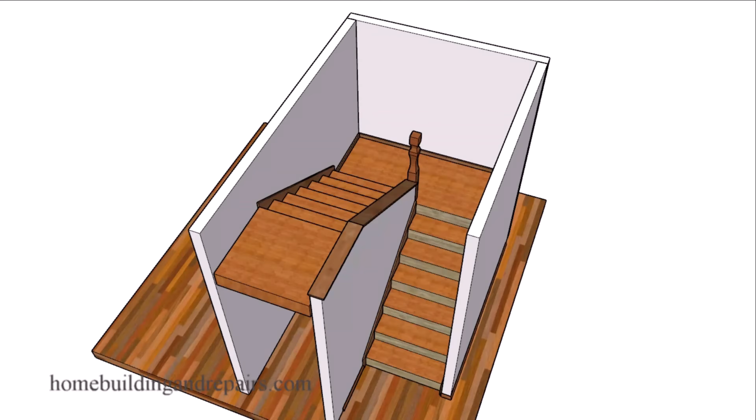Here is another video series that I plan on making more videos on, and that will be about trimming out the stairway, kind of finishing out a variety of different stairways.

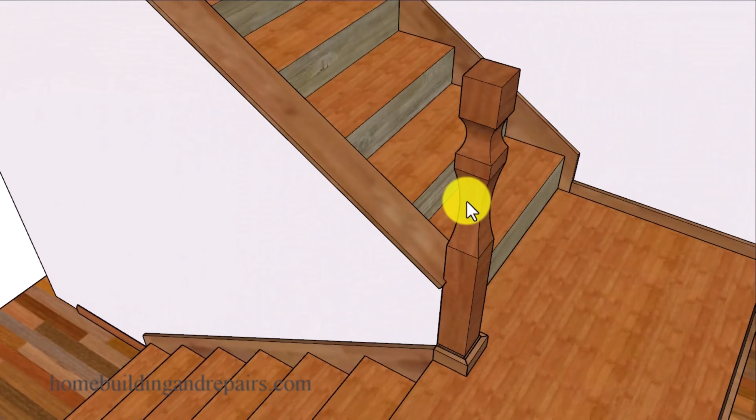And then we're going to have some floor trim that will just kind of go around here, and the floor trim here will die into the edge of the skirt board here. Next up, let's go ahead and remove one of the walls so it doesn't block our view. And this area here is going to be the main focus of this video, and hopefully I'll be able to provide him and you with a few suggestions that might work for you if you run into this problem. So let's go ahead and take a look at the other side here.

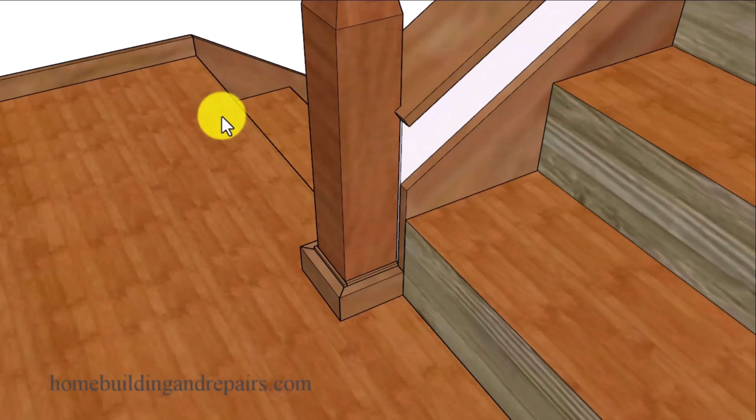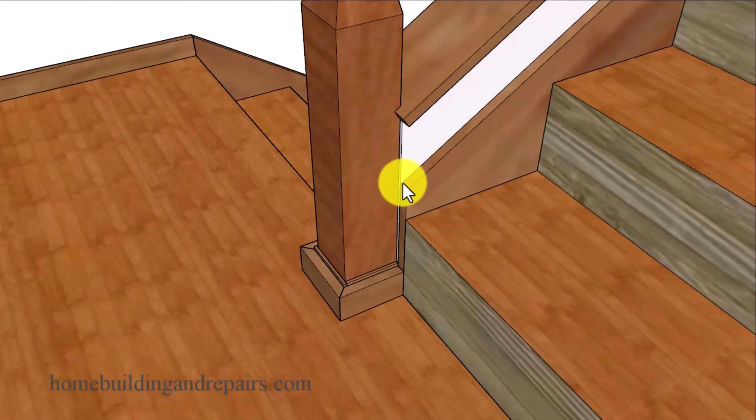And if you're dealing with a situation where the newel post is a little further this way and the skirt board extends out, I still don't think you're going to have a problem using this method here. And for this example here, we're simply going to use the boards again that are the same width, same thickness as the skirt boards for the base boards. And then I'm going to cut some trim boards in here. That will be the distance between the newel post and the other side of the skirt board, or the thickness of the drywall or the wall finish.

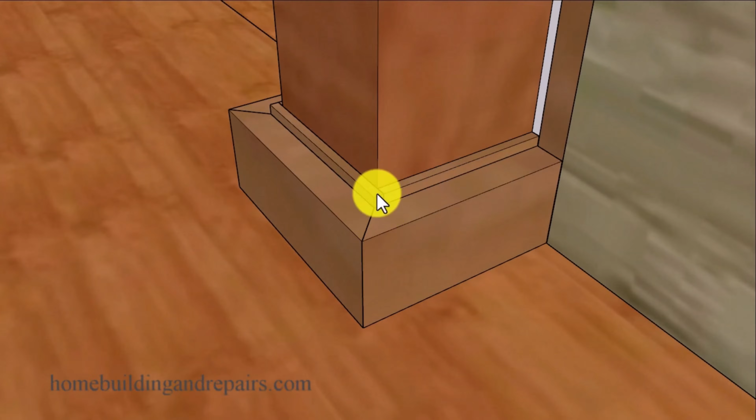And in this example here, I'm just going to hold these up 1/4 of an inch. And again, you can miter these angles also. And I'm only using these to provide us with another detail or design. You could always use different types of trim, as long as somehow they represent the thickness of this area here. You want it to be dying into this area here for this example.

Another thing you could do would be to extend this portion of the trim a little higher. And again, we're using this piece here to die into the wall to create an even or flat surface and a nice transition between the pieces. And as I said, you could always miter the corners if you want it to look a little nicer, and extend the length even higher if that's going to work for you.

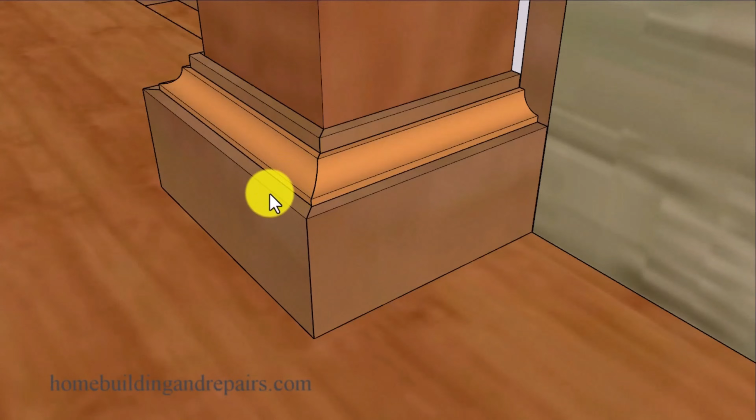Next up, let's go ahead and add some cove molding. And I'm going to have the reveal here the same. We're going to have 1/4 of an inch reveal here, 1/4 of an inch reveal here. And you can see where all of this stuff is making a nice transition into everything, and then transitioning down the top of the skirt board. So not a bad looking design here.

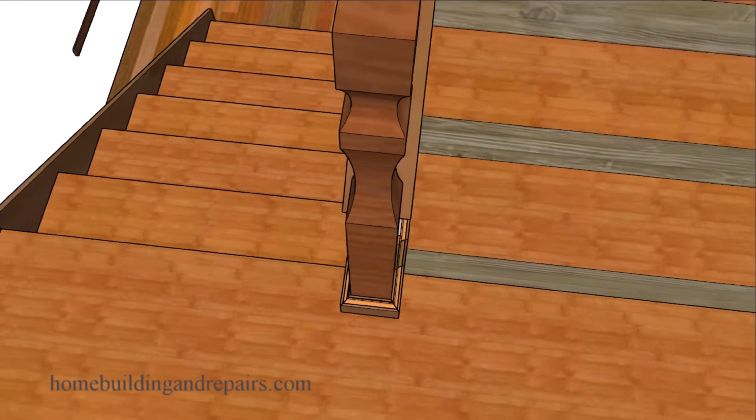And again, just in case you missed it, we can always make these trim boards here wider if we need to, depending upon the thickness of the wall and the thickness of the newel post. And if you want the trim to go up the other side, you can always do something like this. And all I'm doing here is extending this trim board here and then adding the molding. So another nice detail. And again, we're keeping all of this 1/4 of an inch reveal here.

And if you don't like the square corners, you could always grab a router and round these corners off, providing another nice detail. And in our next example, this is another way that I have seen plenty of finish carpenters use to finish something like this. And that would be to not use any wood trim and kind of leave this area as it is. Leave it alone, and then have the top of the skirt board even with the top of the landing. So again, another way to finish it.

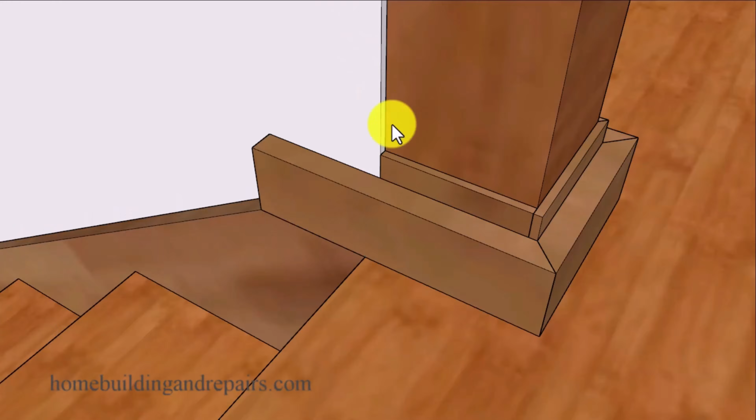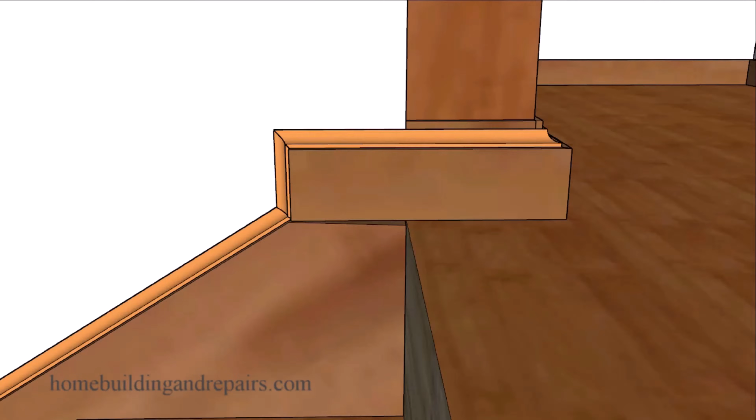And again, when you add all of this stuff here, I really don't know how noticeable this piece is going to be. And if that's the case, something like this might work better. Just bring something out to the edge here, and then run your trim around it. And again, all we're doing here is getting creative. And some of the best finish carpenters out there are extremely creative and can make a variety of different mistakes look great.

Now let's get back to the original question where the top of the skirt board wasn't cut straight. And if that's the case, then this idea might not work well. And I do understand you could always take this piece here and shape it to fit in this area. So that would be another option also. However, it's not going to create a nice straight line here.

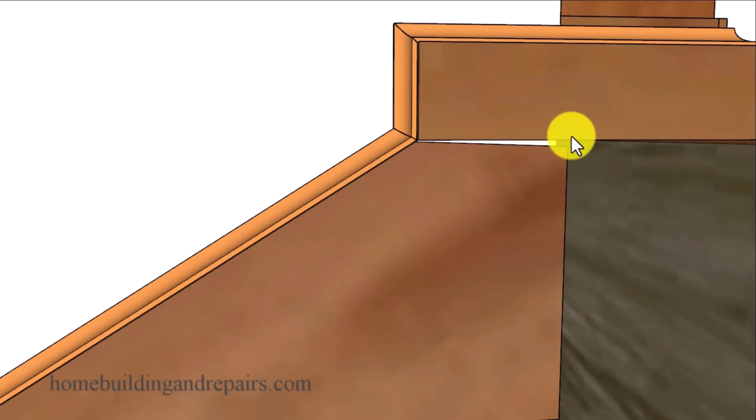And if that's the case, you can always add another trim board. And even though I have a larger one here, you can always use a smaller one and one that is shaped, maybe rounded at the top, rounded at the bottom, and then run the trim around the base of the entire landing to make it look like it was all part of the original design. Now, it doesn't need to run all the way down the stairway, but it does need to finish into something.

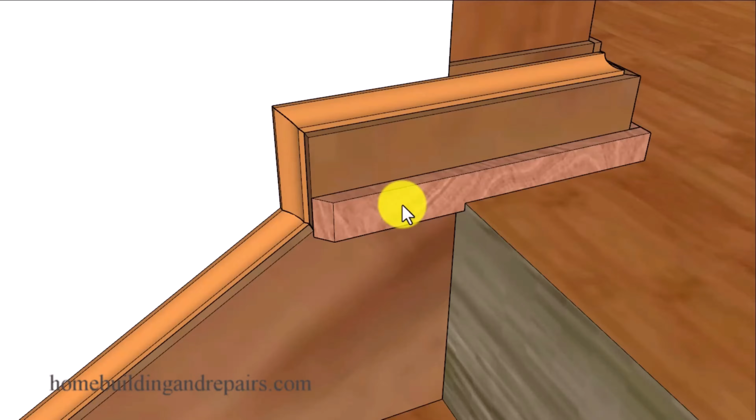And if you don't like this right here, then you're going to have to match the side. Have this one on this side the same as the one on the other side. And again, you can always use something smaller here. And I think in reality, for a situation like this, and like most of the situations you're going to have doing finish carpentry, what most finish carpenters are trying to do will be to cover something by using another piece of trim or create a surface that is going to make a flat, smooth transition without any gaps, or you're going to need to fill it.

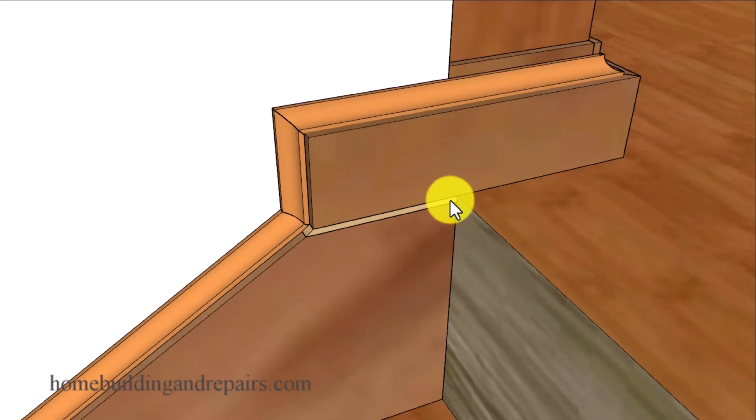And this is my final suggestion. And that would be to cut the top of the skirt board somehow to where it is nice and flat. And then you could use the same wood or a different type of wood to create a nice transition here and fix this mistake. So again, we're either going to fill something or cover it to fix a mistake like this most of the time.

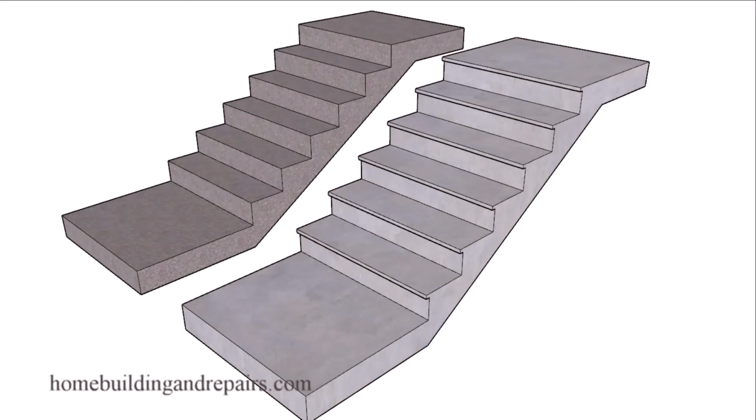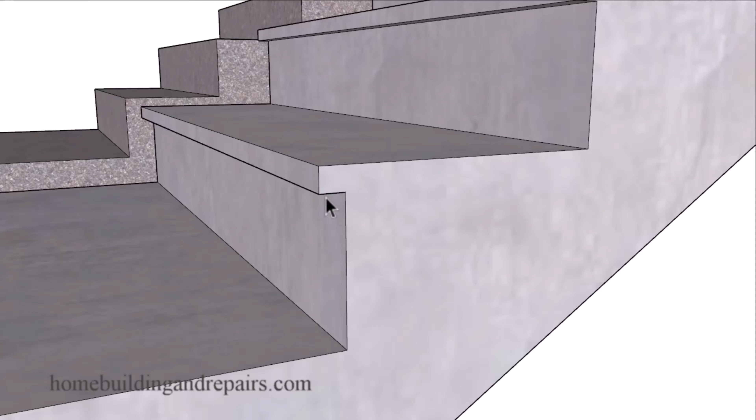Here is another video requested by a couple of our viewers who wanted to know if the nosing, the stair tread nosing, or the overhang, something like this, is a legal requirement. And I have not come across a building code yet that has suggested that it is. However, feel free to leave the building code reference number if you have it for your city, county, state, country, whatever it is, and I'll be glad to check it out. But as far as I know, there are no building codes or, in my opinion, reasons why you couldn't build a safe set of stairs without a nosing.

Now, another thing I would like to suggest is that you take a look at stairs built in your area if you're not going to contact your local building department, especially a building with new stairs, because that will tell you that these buildings were built with newer building codes. And if you notice that all of the stairs in your area have nosings, including those built out of masonry and concrete, then your stairway might require a nosing also.

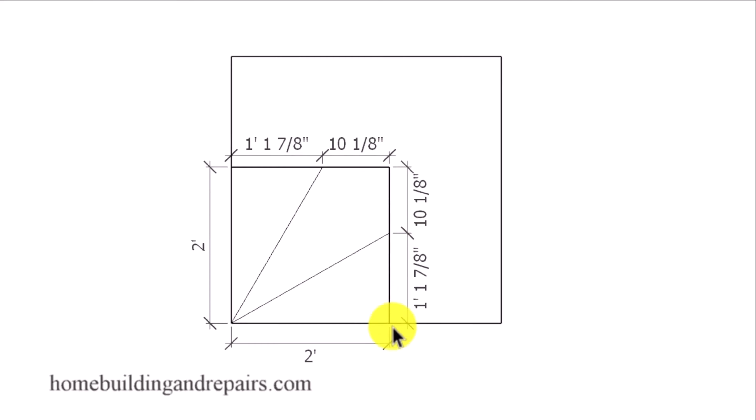And last on our list, we will use a 2-foot square with these measurements here. And the reason why I'm providing you with a 2-foot square, even though this isn't going to work for most stairways, is that we can usually insert our 2-foot square into another square that has larger measurements, like this one right here. So here we have a smaller square inside of a larger square where we can lay out this point here and this point here in this square, and then simply extend these lines out to the point where we need them to be.

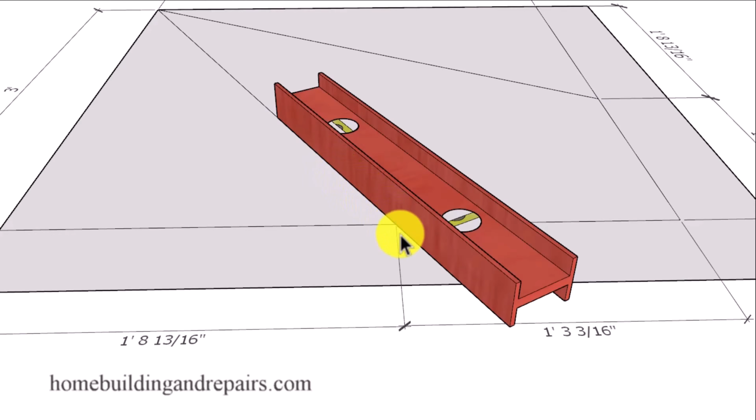Or we can use our 3-foot square with our 3-foot measurements also, and simply grab a straight edge like a level and then line it up with our line here so that we can continue this line to the desired point. And we can always check the measurements after we have extended the lines, to make sure that they are exactly the same or close enough for your tolerance.

So to provide a brief summary of what we've done so far, we've just simply grabbed a smaller square where we know what the measurements are and extended a line from the center point to our new location to provide us with a 30-degree angle.

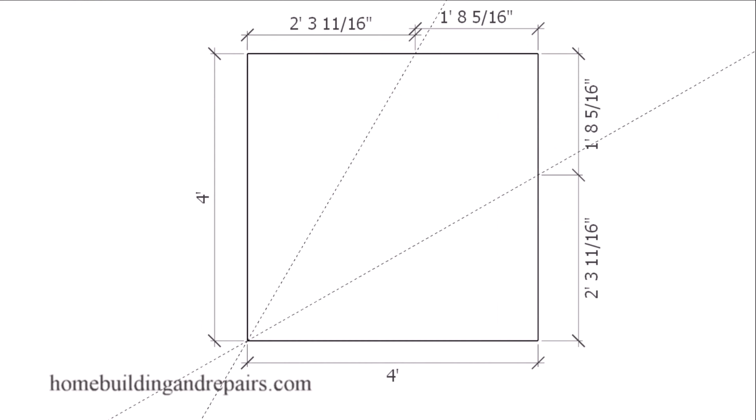Next up, let's just go ahead and provide you with a couple of things that you might think would work. And one of those would be to measure across at a diagonal and divide everything up equally. And you can see here where this measurement and this measurement are exactly the same. However, the one in the center is not, for those of you thinking that it might be when it isn't.

However, we can use another method that I found while doing some research for this video, and that would be to use a 2-foot radius and simply draw a curved line. And then from this point here, we're going to draw another 2-foot curved line using this line right here as our center point. So not too difficult.

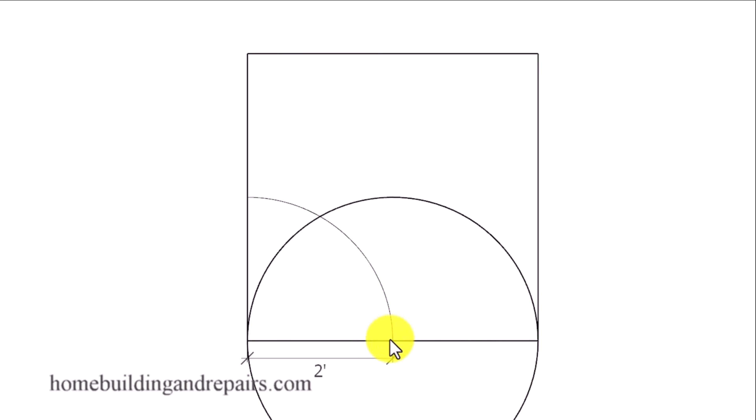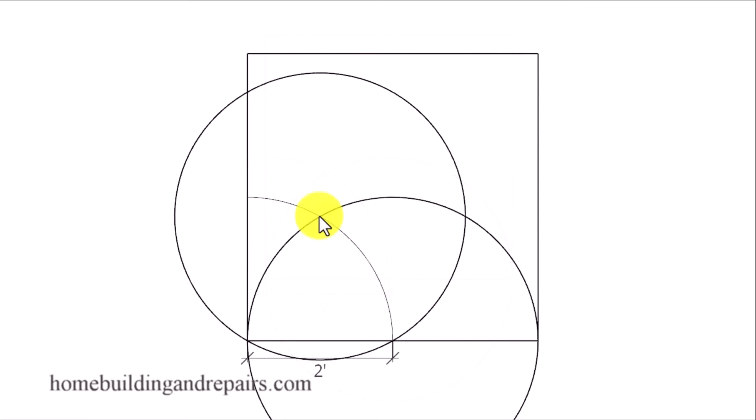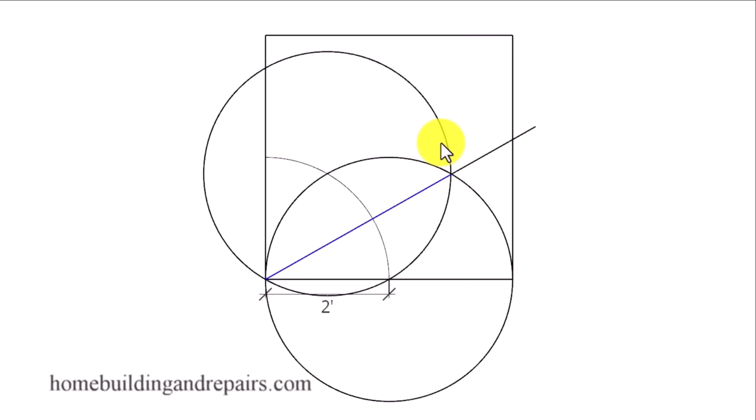So now that we have this right here, let's go ahead and draw another circle with a 2-foot radius. Now you don't need to go all the way around. Same thing with this. You just need to get to the intersecting points, which would be here, here, and here. Because next up, all we need to do is connect the dots here. We can draw a straight line from this point right here through this intersecting point where the circles are intersecting with each other, and that would look something like this.

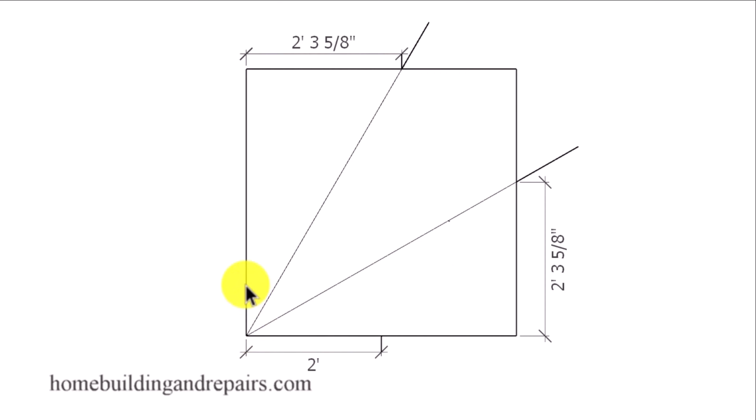Now, once we have this line, we can simply measure the distance from here to here and transfer it over to here, to play connect the dots again and draw a line through here, providing us with 3 30-degree angles. We have a 90-degree angle. If we divide that by 3, we're going to get 3 30-degree angles. And in my opinion, it can't get much simpler than this.

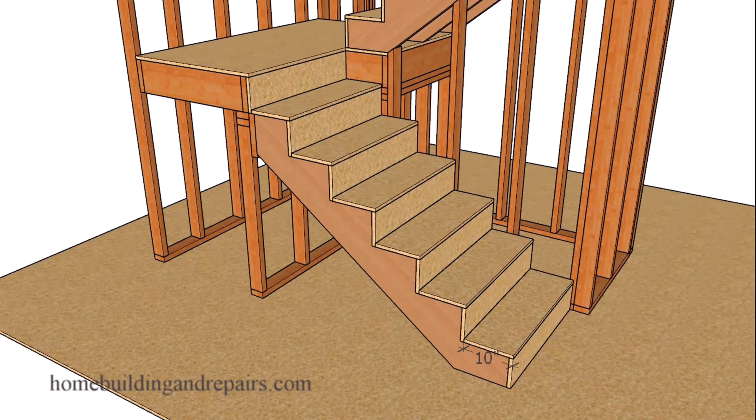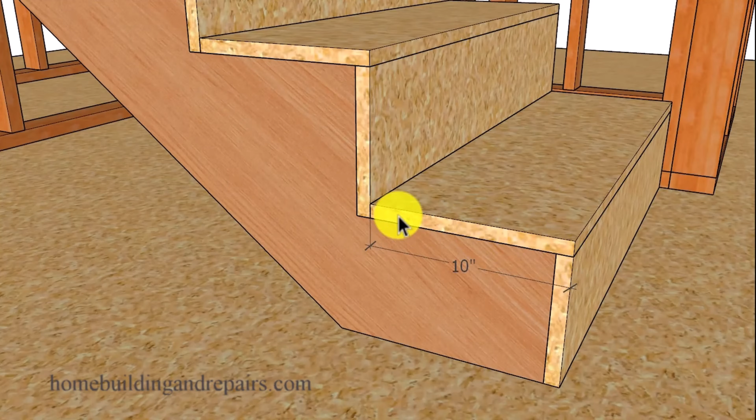Here is a building code that changed in the International Residential Code books in 2021, and you would need to check with your local building department to see if they are going to enforce it. That code is suggesting that if you have any treads smaller than 11 inches, then you will need to install a nosing on those steps.

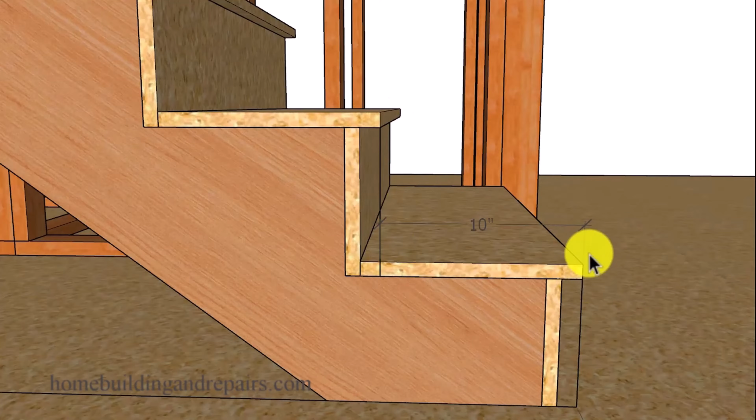I have built over 1,000 sets of stairs in my career and can tell you that most of the time we used a 10-inch tread measurement along with a 1-inch overhang, providing us with an 11-inch step. For those of you who are a little confused, we're still going to have a 10-inch tread. I do have other videos on that, but the building code measures the tread from the farthest protruding point on the step above to the farthest protruding point on the step below.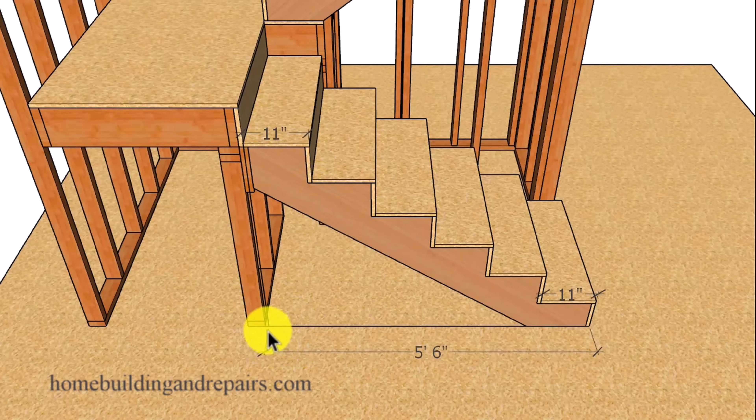So we're still going to have a 10-inch tread, and that can usually be seen when you're laying out or designing the stairway. So here we have 60 inches and 6 steps. However, if you make the steps 11 inches wide, now we're going to have 66 inches down here, then you won't need a nosing. That's basically what this new building code is suggesting.

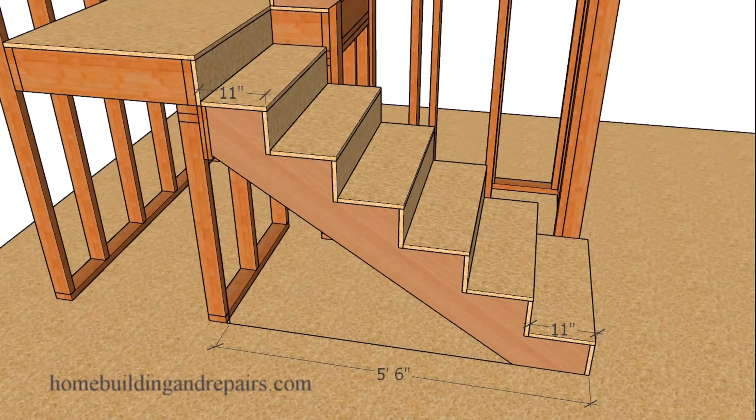I would suggest contacting your local building department or local building code enforcement inspectors to verify whether or not they are going to use this particular exemption.

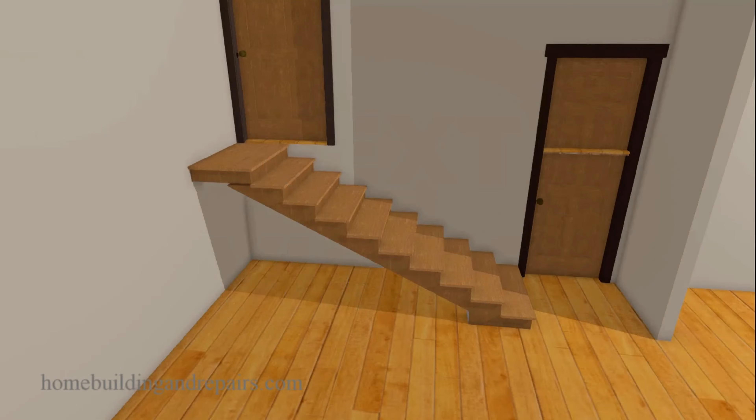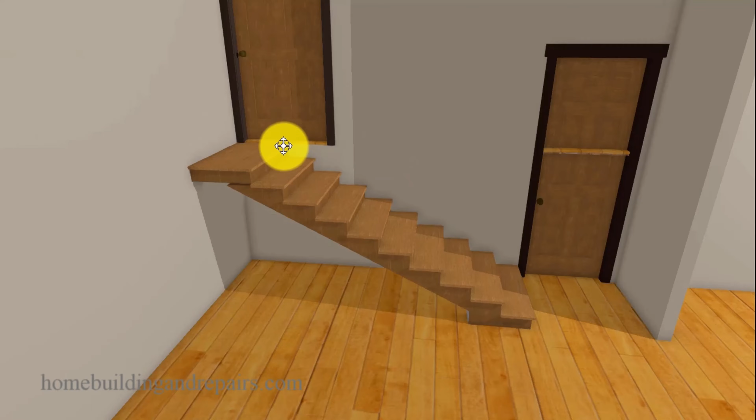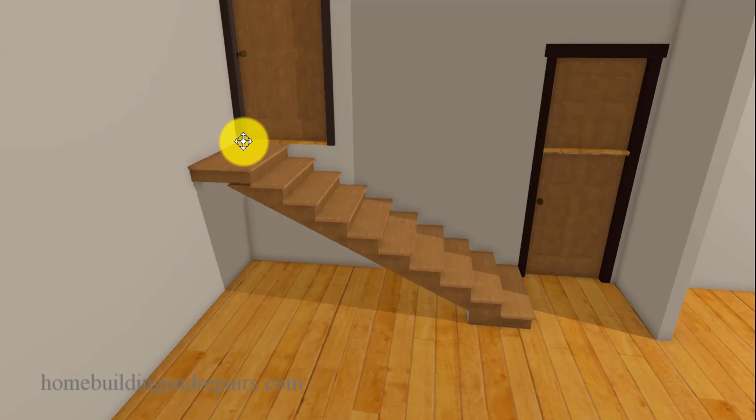Here's something you are not going to see every day, and I believe this is about the first time I ever witnessed it. Someone sent me a picture, and it looks something like this. The edge of the landing, the front nosing, was located about in the middle of the doorway, and in reality it needs to come out to the edge of the door, and of course that would depend upon the width of the door. I think most building codes require a minimum of 36 inches, 3 feet in both directions, but of course that would change if you had a door, and I'm not familiar with those building codes.

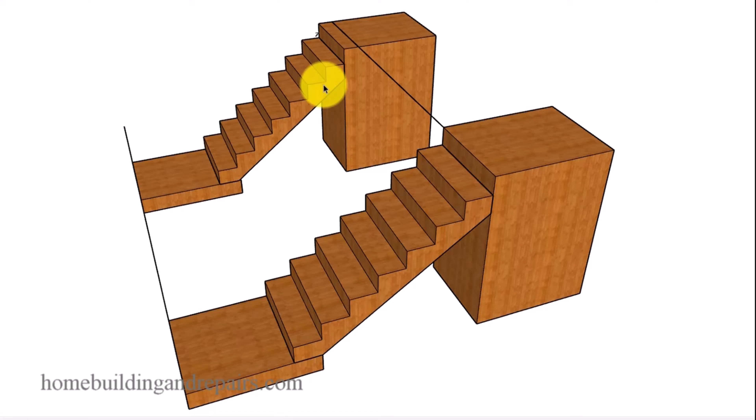But realistically, the only way you're going to fix something like this will be to shorten the width or the depth of each individual step. It's the only way I could think of fixing something like this. It would be up to you to figure out if it's even worth changing, because sometimes you are going to create a bigger problem by having a tread that might be a little smaller than approved by the building code. So you're basically trying to solve one problem, make the landing a little longer, but if you don't have enough room, you're going to be creating another problem by making the steps a little smaller or the risers a little taller.

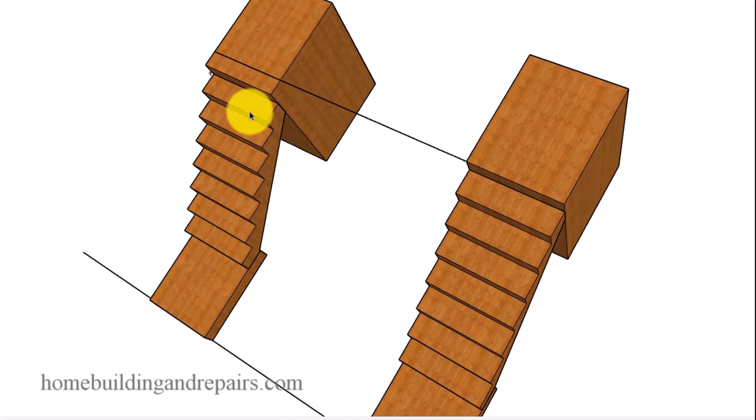So let's go ahead and take a look at what we got here. You can see these are 10-inch treads: 1, 2, 3, 4, 5, 6, 7. So we would have 70 inches between the face of the landing at the top and the face of the lower tread if we drew a horizontal line. I'll show you more what I'm talking about there in a second. So this right here will give us 7 more inches. 7 steps, we take 1 inch off of each step, and we now have a 9-inch tread. This is an illegal tread according to most building codes, but you would need to verify that in your community or through your local building and safety department.

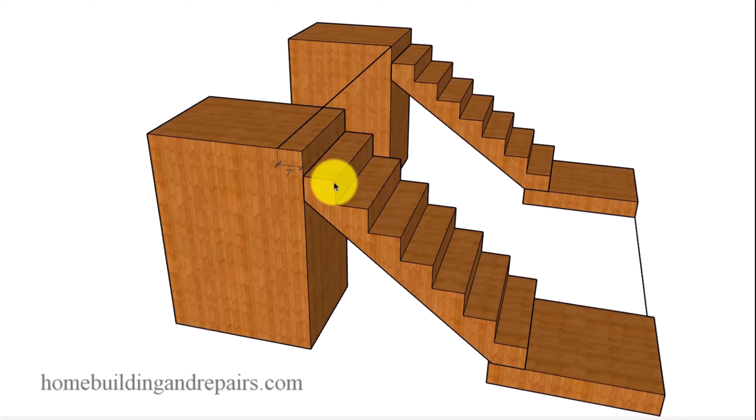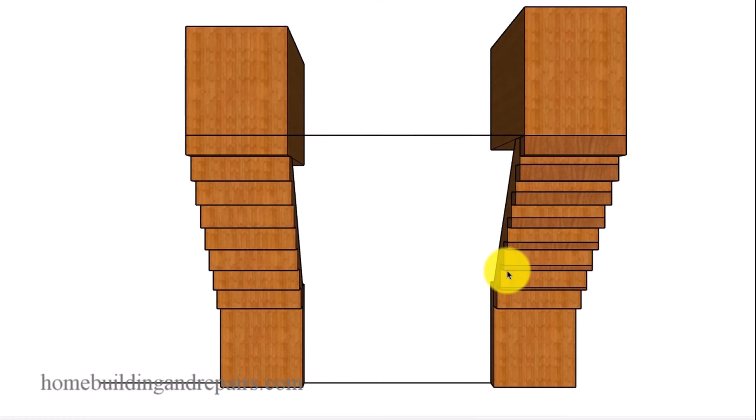If you're looking for a method to fix something like this and you don't want to tear apart the stairs, you could simply add incremental sections to the front of each step to create the new stairway. So we're at 7 inches here. We would need to add a 7-inch piece to the top and only a 1-inch piece here. You would add 1 inch, 2 inches, 3 inches, 4 inches, 5 inches, 6 inches, and 7 inches to the front of the stairs to eliminate cutting a new set of stairs or building a new stairway. So something like this might work. Again, I'm just kind of throwing out an idea here.

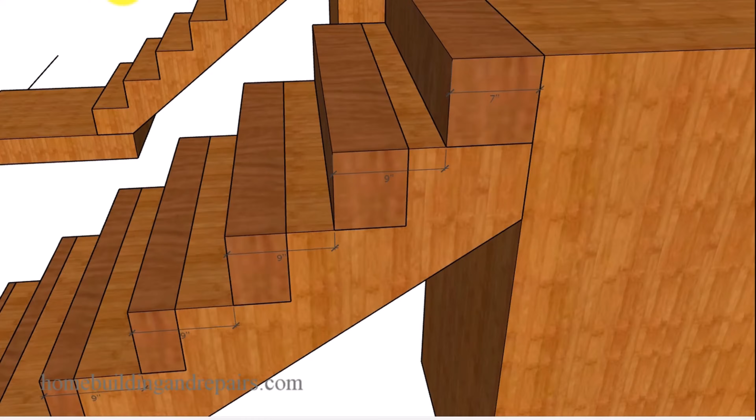Something else you might want to do would be to remove one of these steps. So we have 7 here: 1, 2, 3, 4, 5, 6, 7. We have 5 foot 10 inches, which is 70 inches.

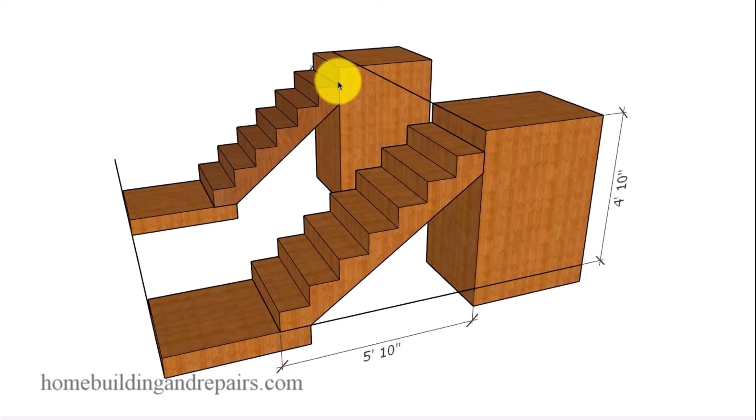And if we simply make it a little smaller, 1, 2, 3, 4, 5, 6 steps, if we can eliminate a step, but that would increase the riser height, then that might be another option. But of course, this would involve tearing apart the stairway and rebuilding it.

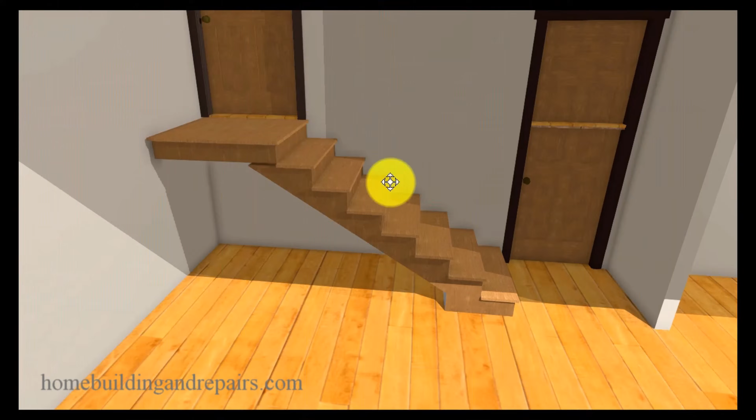Now for the bad news, I would imagine that your stairway was built that way for a reason, and you might not have enough room to build a stairway that's going to meet local building codes. So let's just go over the building codes. 7 3/4 of an inch is usually the maximum height for each individual riser. And the depth is usually going to be 10 inches for a residential set of stairs for a private dwelling. Now, you would need to check with your local building department to verify that information.

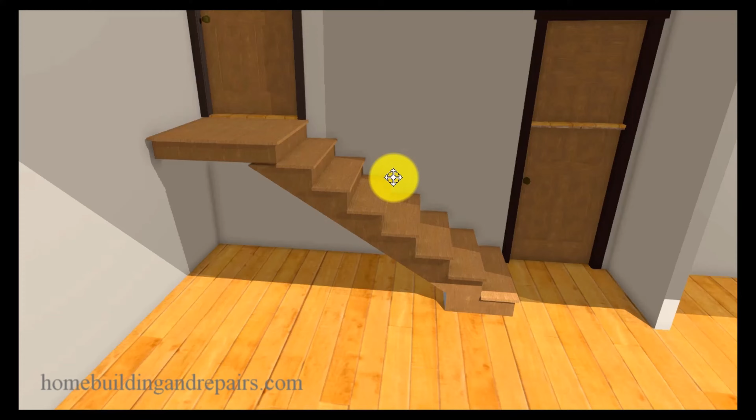And I hate to say this, I wouldn't bring this to your building department's attention. I wouldn't say, you know what, I've got a problem here, because they could make you do some work here. So I'll leave it up to you whether or not you want to bring it to their attention. I have known people who have brought stuff like this to their attention, and it's cost them thousands of dollars. But I'll leave it up to you. You want to leave something unsafe or you want to fix it, do it right. That will be your final decision.

Now, here's the distance I was talking about when I was asking the person in the email to measure between the doors. If you have enough room here, this will determine your tread size and how many treads you'll be able to use. If you have 70 inches here, then you're going to be able to put 7 steps. If you have 60 inches, but you need 7 steps, you're probably not going to be building a safe stairway. So I think I've driven that point home enough. You would need to do all the calculations.

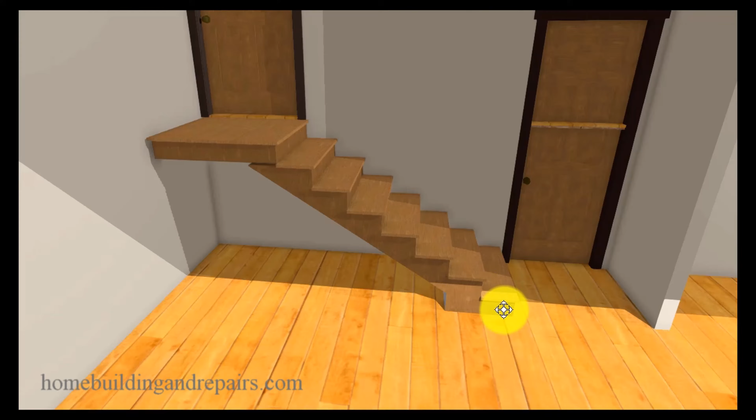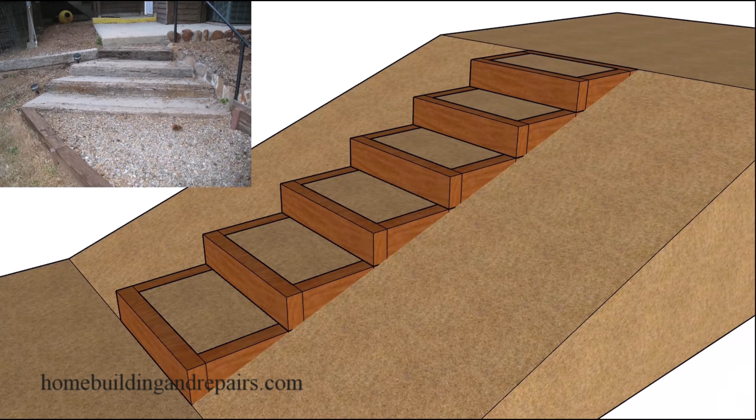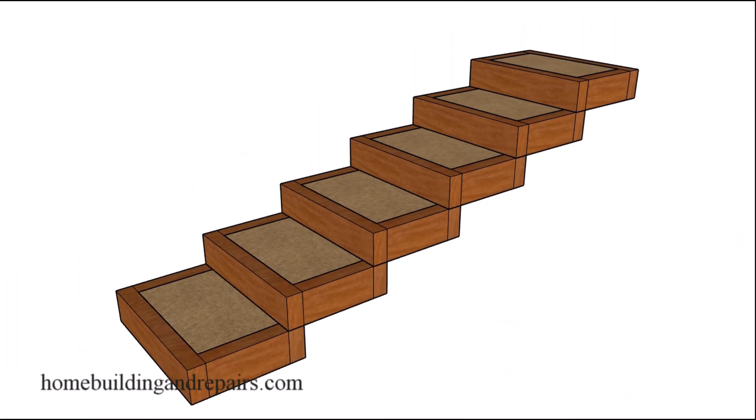Here's another outdoor stairway I come across and wonder why it was built that way, but understand that most of us look at something and think, you know what, that's easy to build and that's a great idea, I'm going to do it the same way, and that's fine. But I'd like to share my opinion with you for this particular stairway. And it's quite simple. It's just built out of boxes. Usually, I've seen people use railroad ties for this.

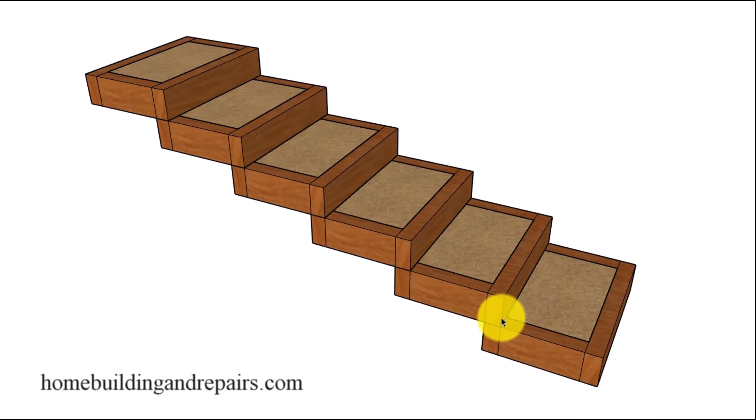6x6s, 6x8s. These are 4x8s. They're 3.5 inches wide by 7.5 inches wide to keep the step at 7.5 inches. The maximum for most building codes will be 7 3/4 inches. If you're doing it for someone who has a difficult time walking up the stairs, you might want to use a 4x6, something that's a little smaller, maybe 5.5 inches instead of 7.5 inches. And of course, there's a bottom view of it. Another view, just boxes stacked on top of boxes and filled with dirt. So this particular stairway is just filled with dirt.

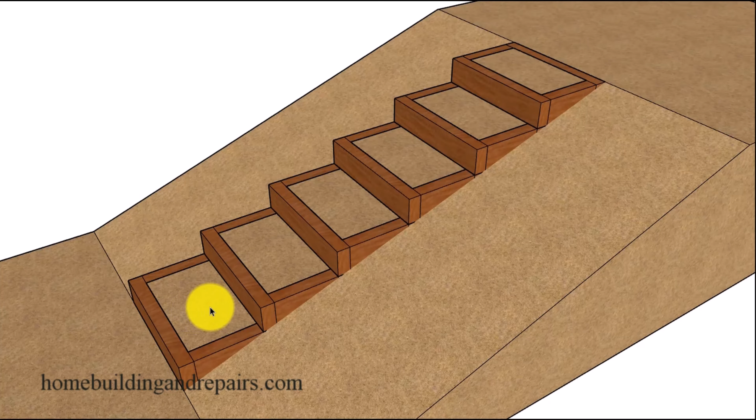I do not like this design because when it gets wet, and depending on the dirt, if it's sand, it's going to be difficult to keep in here. Sand's going to just spread all over the place. And if you get sand on the edge of this and you're walking down or up the stairway a little faster than normal, this is going to be slippery. I do not like sand. And if you're going to fill it with dirt, you're going to run into the problem when it gets wet. This stuff's going to be slippery, and of course, you're going to be tracking it all over the place. So dirt, not a big fan of.

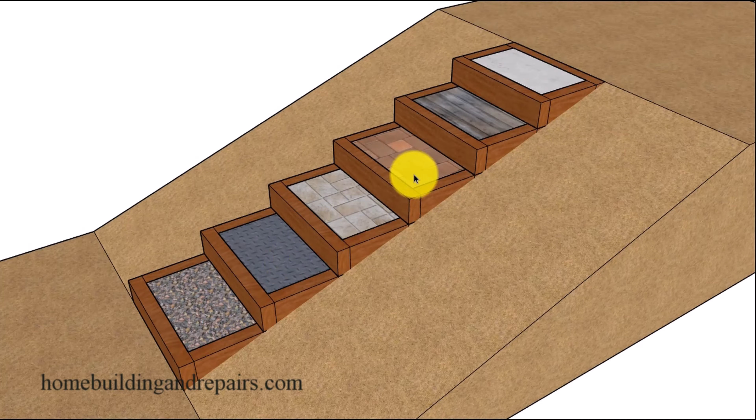Now let's go ahead and take a look at a few more products: gravel, metal, tile, pavers, wood, and concrete. And of course, gravel is, well, you see this a lot. People fill it with gravel. And again, I understand this is easy to do. Build your square box out of wood, stack them on top of each other, and fill them with gravel. I see this a lot.

Gravel is going to be difficult to walk on. You walk up and down a stairway in bare feet with gravel, you're not going to want to do it again. Not a big fan of that. Someone runs up the stairway, they're going to knock some of the gravel around. You're going to be filling it with gravel every once in a while, or refilling it.

Metal, not really a big fan of that. And of course, you're not going to see this. I just kind of threw it out there for someone who thought, you know, hey, I need a different look. Metal over time could rust, but of course you could get some metals, maybe stainless steel or something galvanized that's going to last a little longer.

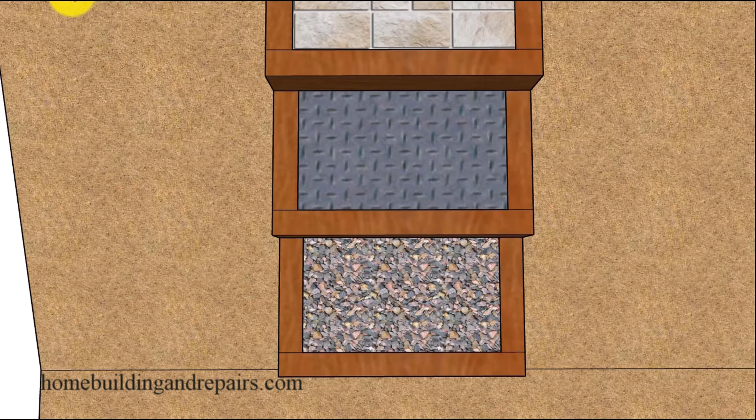And this one here is tile. And if you're going to use tile, you're going to have to fill it with concrete. You're going to have some type of a base that the tile is going to adhere to, and most of the time that's going to be concrete for an exterior stairway. So if you're going to use something like tile, why not fill it all the way to the top with concrete and use some type of a decorative pattern, a stamp or something that they use to make the concrete a little nicer.

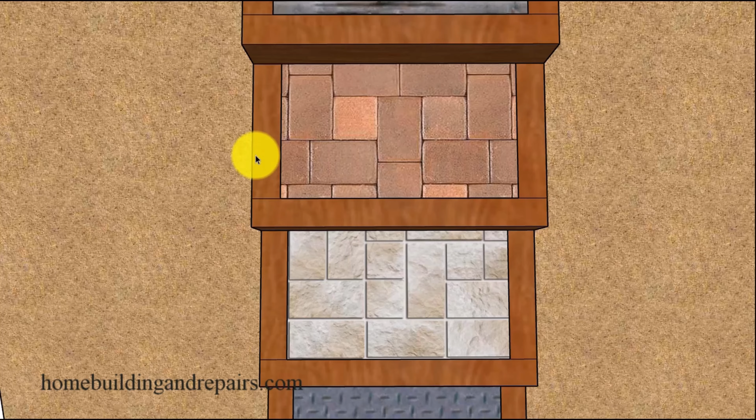And of course, pavers. Now, pavers would bring us back to the gravel. This is going to be something that will be a little easier to do. And if you were going to design a stairway using pavers, I would also recommend to build your boxes to where you can use pavers to where you won't have to do a lot of cutting. So you could see this wouldn't be that good of a width or a length. If this was a little smaller, then you would just have these here. So if you can kind of keep it in a pattern like this, that would work better.

And of course, wood. You think about it, this is going to be wood. You could always fill this with wood, and I think you would be okay. And if you were going to use wood for the box and wood for the steps, it wouldn't be a bad idea to protect the area where the wood is touching the soil with gravel. Put a gravel spacer of at least 2 inches in between the wood and the soil.

And again, this isn't a video on how to build this type of stairway.

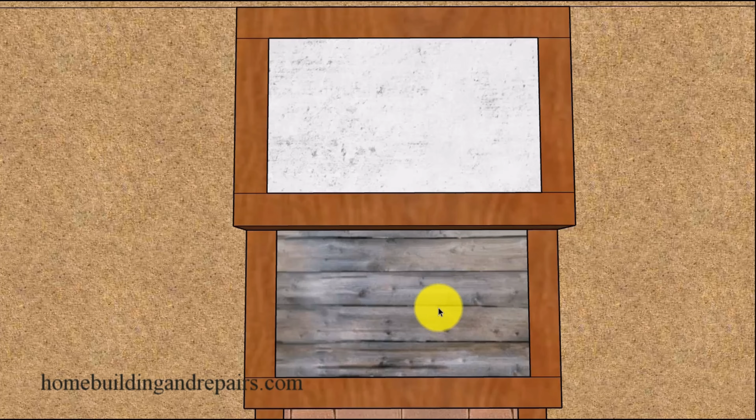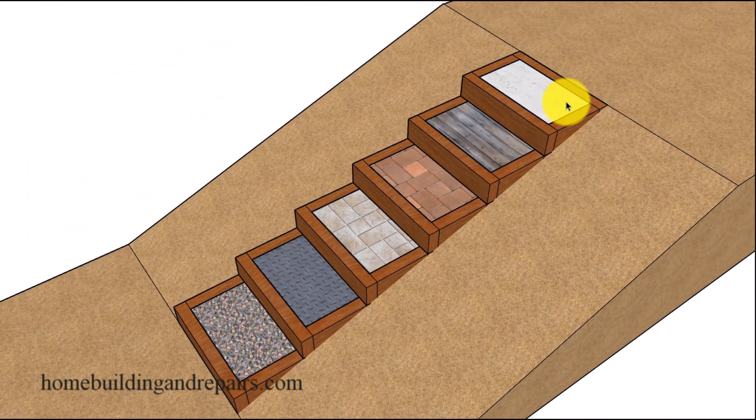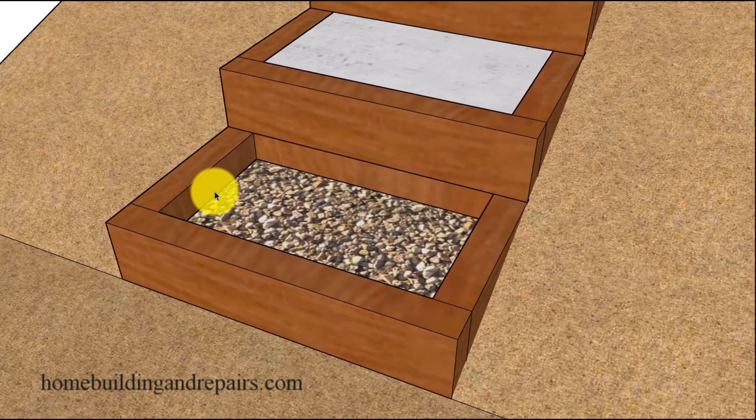This is a video on what type of materials you would use for your steps. And of course, in my opinion, concrete is going to be the best way to build this type of stairway. And that can simply be done by building your boxes, filling it up with gravel. And like I said, the gravel's a good method for keeping some of the moisture away from the wood, especially if you have an area where the water is going to drain away safely from the gravel.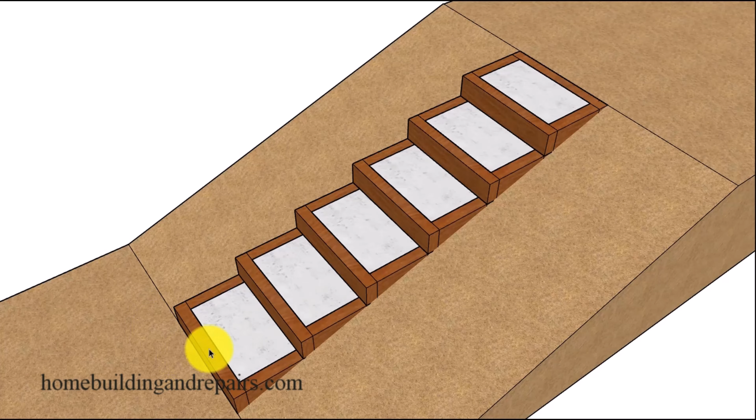Let's go back here. It wouldn't be uncommon to have gravel, and if you didn't have any area for the moisture or the water to drain away at the bottom, it wouldn't be uncommon to find the bottom step rotting and the upper steps perfectly fine, because all the water is going to flow through the gravel until it hits this area here. So it wouldn't be a bad idea to put some type of a drainage system or gravel at the bottom to where the water won't accumulate in the gravel.

Hope that makes sense. So again, fill the gravel up a little bit. Give yourself about 3.5, 4 inches. You can always use rebar if you want to. Fill it with concrete and you are done.

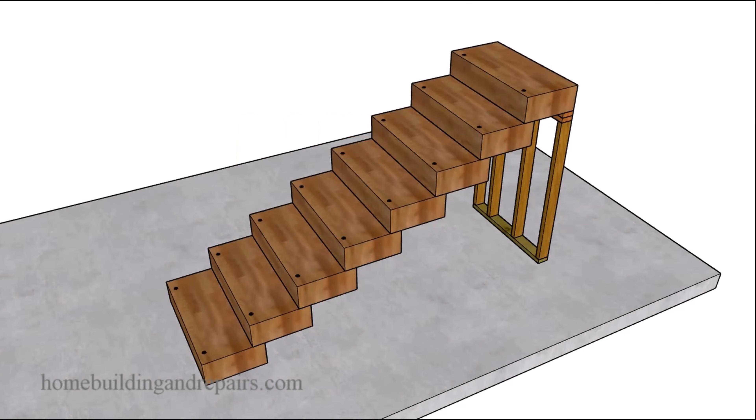Here's another one of those crazy stairways I have seen built before. Never built one myself. Remember, I am not an engineer. I do not guarantee that something like this will work. I mean, the last thing I want to do is provide you with something and tell you that you can make this 50 foot long.

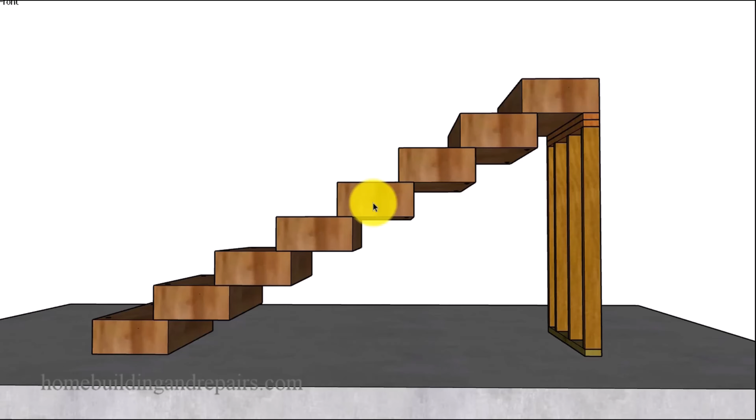I cannot guarantee that. Would something like this hold up if it was made out of 4 or 5 steps? I don't think it would be a problem. But when you get to where you're building a stairway that's even this size, it could be. And I would hate to tell you you can build something like this without any engineering on it. Just ain't going to happen. So build this at your own risk. I'm just kind of throwing out an idea, something I think might work.

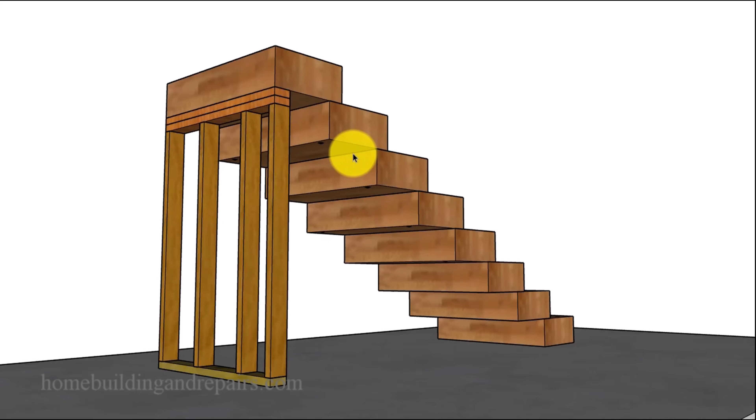And that, of course, would be bolting some large pieces of lumber together. And you can always put a few more bolts in. This has 2. You could put 3 or 4. You could put metal brackets on the back of it for some extra support. And, of course, you could always put some braces under it. Maybe a wood post under it, the middle of it, for some additional support. That's where it would be the weakest.

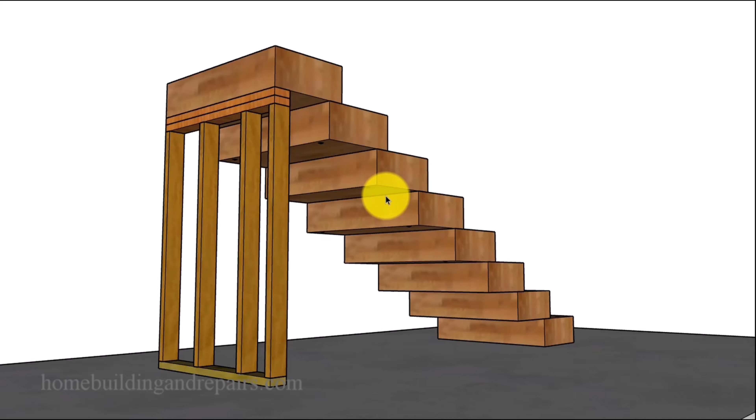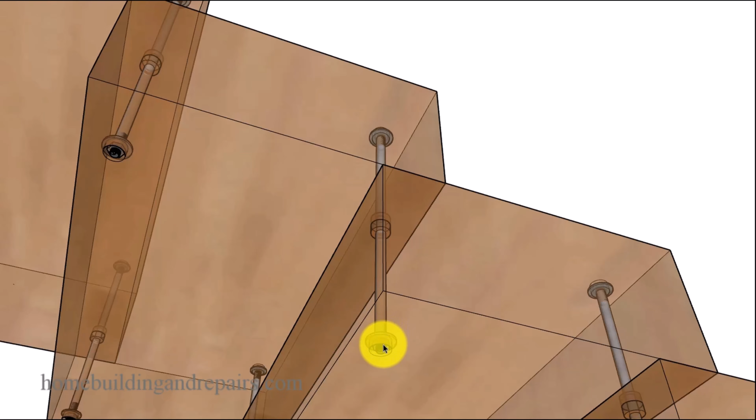You build something like this, and it would tend to have problems more in the center, or even a couple of posts might be needed on longer stairways. Now, just simply a 8 by 16. This is 7.5 inches by 15.5 inches. Large piece of lumber, and just bolted together with some all threads. And I think in the diagram here I'm using 1/2 inch all threads. And you can just see there's a washer and a nut at each end.

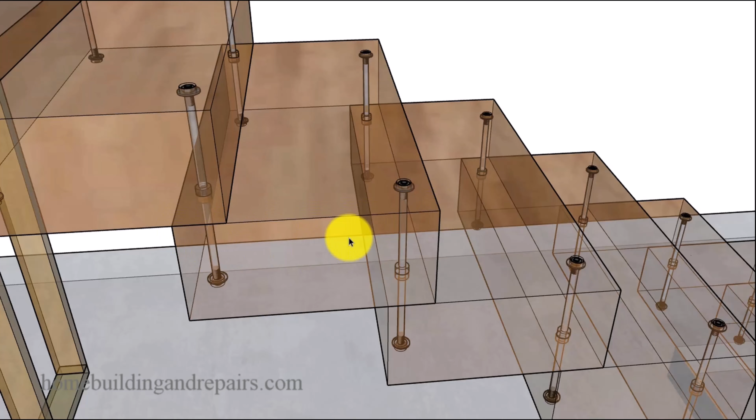And again, like I said, you might need 1 or 2 more of these depending on the stairway. And of course, you might need larger pieces of lumber for something like this. Instead of something that's 15.5 inches, you might need something that's 16.5 or 17.5 inches, or even a little longer depending upon the step. 7.5 inches is pushing it for the riser height, and that might not even be something that would be approved on a public stairway. I think a public stairway is 7 inches. Private is 7 3/4. Keep that in mind. I do have other videos on that.

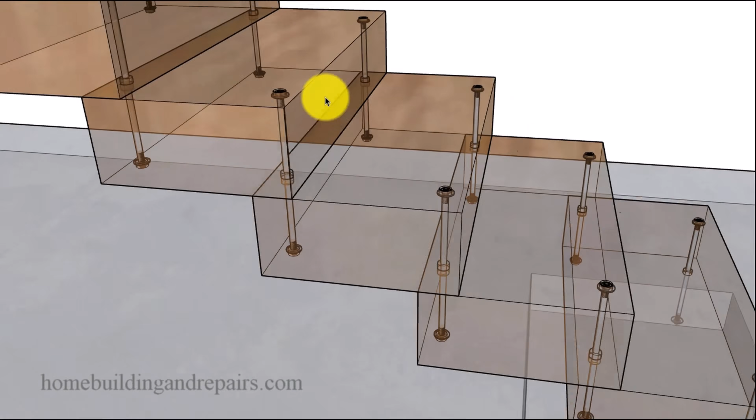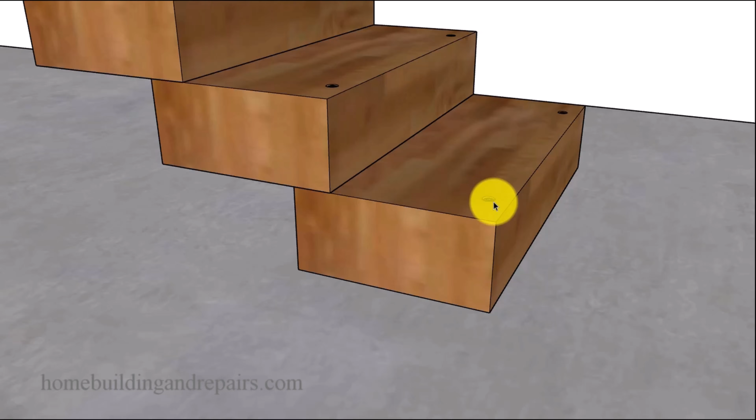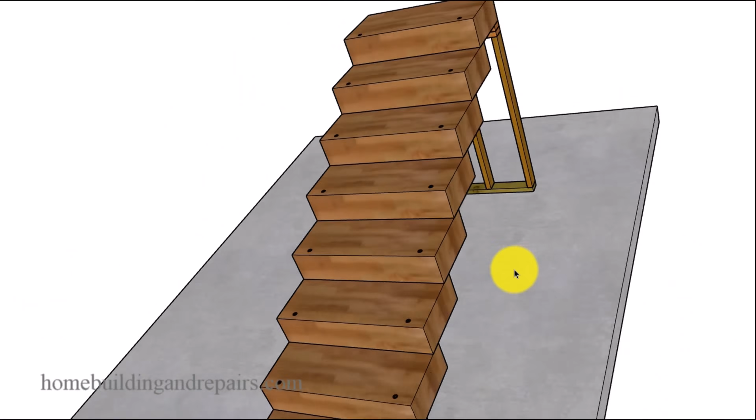You could attach the bottom into the concrete slab with another all thread and some type of an epoxy-based concrete system. And then, of course, you're going to want the nuts and the washers, or the top of the all thread, to be a little lower so that you can put plugs or some type of filler in there. I don't want people to be tripping over anything sticking above the top surface of the step. And again, like I said, throwing this out there, seen it done before, think it'll work, but you'll build this at your own risk.

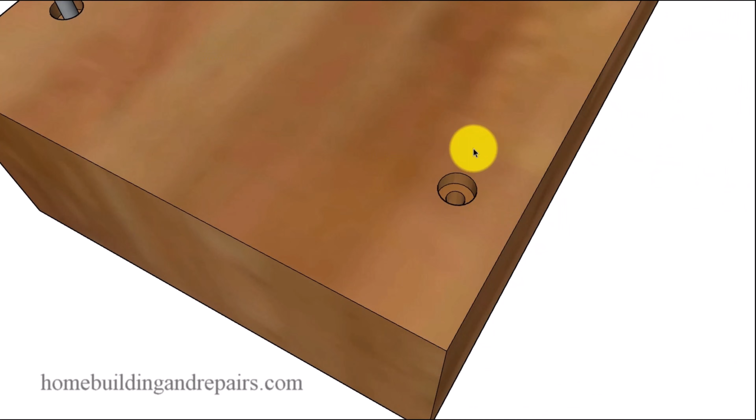Let's go ahead and take a closer look at the block, what might need to be required. So here's what the all thread might look like. Of course, I don't have an all thread here. This is a bolt design, and all thread is threads all the way down. If you can get a bolt like this, it might work for you just fine. All threads are more common. And of course, bottom of it. Just wanted to give you an idea. Sometimes a few more pictures can help people out.

That would be countersunk in a little bit to allow for the width of the washer, top view of it here. And if you drill these holes the same distance, I think I have it here about 1 3/4 inches away from the edge, but yours might need to be different, might need to be a little deeper. And I did the same on the side here, and that everything lines up that way. But you will have to figure out where to drill these holes.